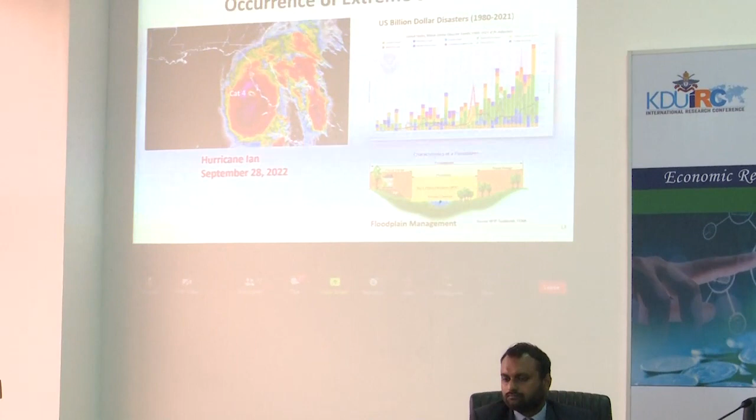When you look at the cost of these events, what we call billion-dollar disasters, they're increasing significantly in recent years. This might be the result of development without any planning, and that's a sign we are going to have more and more losses in the future.

One aspect we should think about, which is not really happening in Sri Lanka in my mind, is this whole idea of floodplain management. If you take major river basins in Sri Lanka, every year one of the basins will be flooded, now more and more frequently. I think we need to think about floodplain management in the context of climate change, and it's something I've been trying to promote in Sri Lanka for some time.

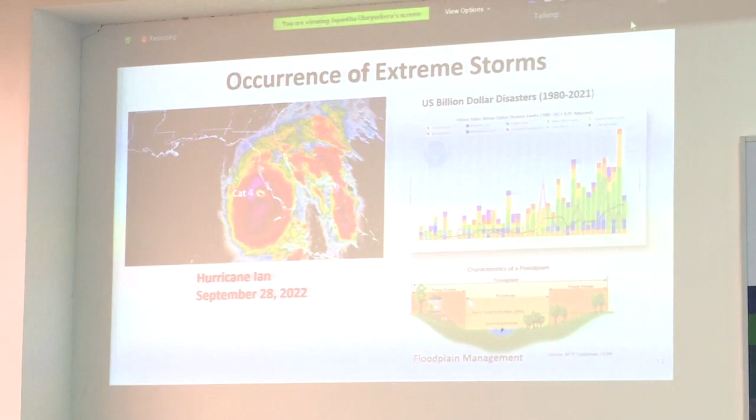The other aspect we don't talk much about as civil engineers is this groundwater or saltwater intrusion effect, particularly along the coastline. The saltwater intrusion will basically affect high-rise buildings or other buildings, with salty water coming in and affecting the foundations and maybe even piles that you construct for buildings and others. This is a new area of research, and I will tell you the reason why.

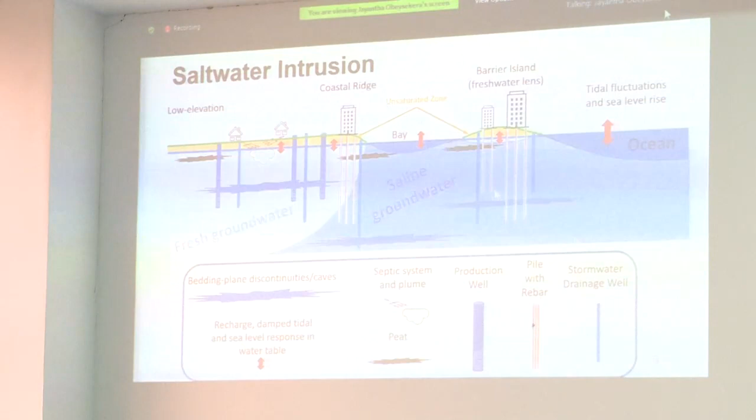This video I'm going to show is from YouTube. Let me see - this is a collapse of a building in Miami Beach. You will see that this whole building has collapsed. So this is what happened after the building collapsed. Everybody was wondering, because we don't design engineering buildings to collapse like this. So what is happening underground is probably the main culprit - the saltwater intrusion due to sea level rise basically corroded the foundation, something like a threat underground that we don't know about, and that's something we need to think about.

This whole concept of stationarity and non-stationarity is something Professor Fernando mentioned, and something I've been researching lately. Traditionally in engineering, we assume stationarity—meaning the basic laws and patterns stay the same, and the past climate is an indication of the future. So when we design for the future, we assume the probability of extremes remains the same through time, and we use the concept of return period that many of you engineers might be familiar with.

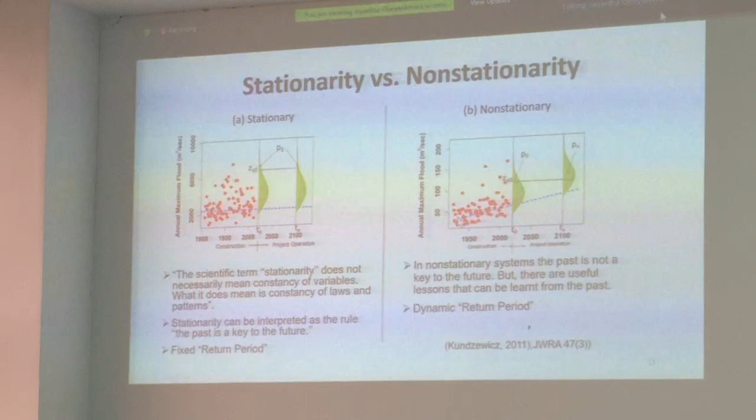Now, under non-stationarity, the probability distribution will basically be changing with time. It will be lifting up with time because of this trend that we might experience in the future. So there are many challenges in analyzing this.

We have done some research on how to plan for projects under future conditions like this. In this case, the past is not a good indicator of the future. We need to think about what could happen in the future—can we extend this trend into the future? Those are some of the challenges.

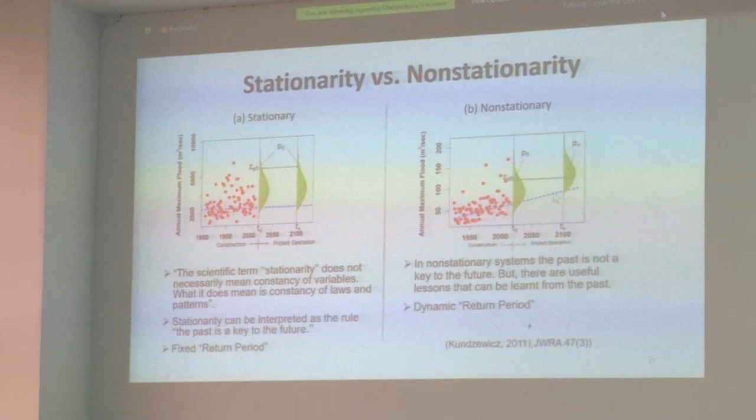So we have a situation of dynamic return period, which I'll explain in a few minutes. In other words, the return period as a fixed quantity cannot be used for planning anymore in this paradigm. This is an example of sea level rise—even in designing bridges or roadway infrastructure, the dynamically changing extreme probabilities will require a new paradigm for planning and design.

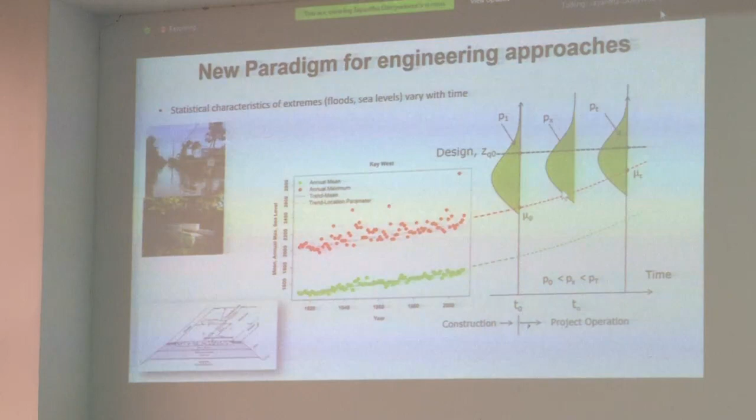I don't want to go through all the details of this graphic, but the return period will actually decrease. If you design for a 100-year return period today, for example, it may have only a 50-year return period by 2040. So in other words, your level of protection is decreasing.

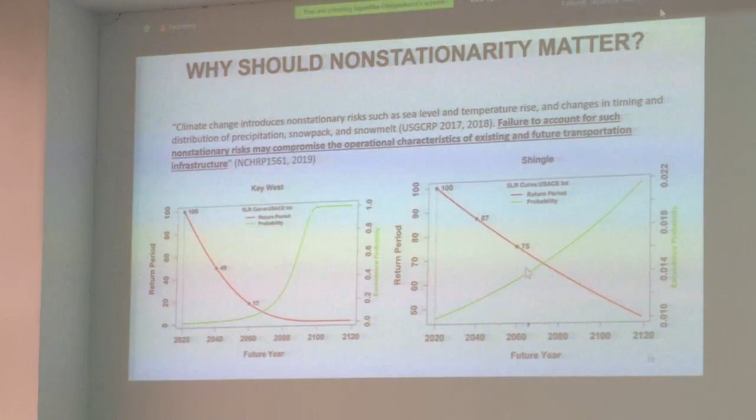And the same with another location—this is for sea level rise on the left and flooding on the right. In other words, the return period concept that we have been using as engineers for generations will not work anymore in this kind of setting.

I have come up with ways, if you specify that you don't want a higher risk than, say, 50%, to determine what you need to design for. So this risk-based design is an approach that could be expanded so vulnerability can be incorporated into this concept.

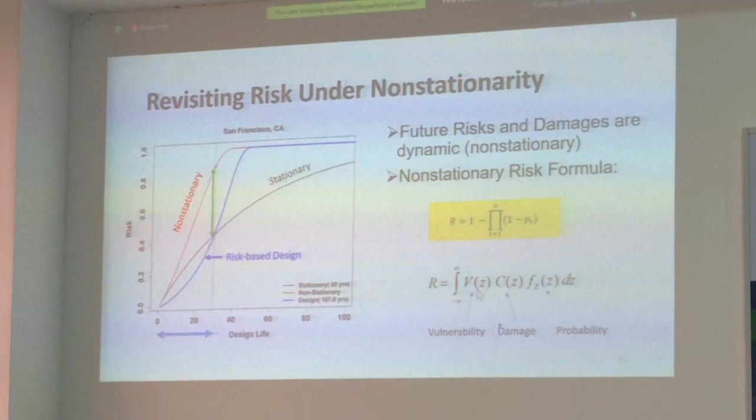The concept I want to promote is called dynamic adaptive pathways. We worked with the Dutch on this. The whole idea is that we are in an existing situation with highly vulnerable conditions, and we've had that for generations—there's no change in that. We have aging infrastructure, but we have this current situation.

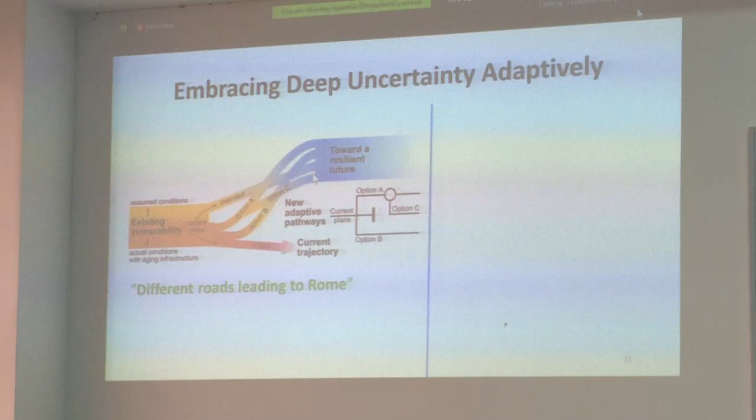But the future is non-stationary, and due to climate change it is uncertain, because prediction of climate change is not easy. We have what we call a situation of deep uncertainty. So how do we plan for that kind of uncertain future? The approach is basically looking at different adaptation pathways and tipping points. This concept of dynamically adaptive pathways is a wonderful technique that we should think about in dealing with non-stationarity and climate change in engineering.

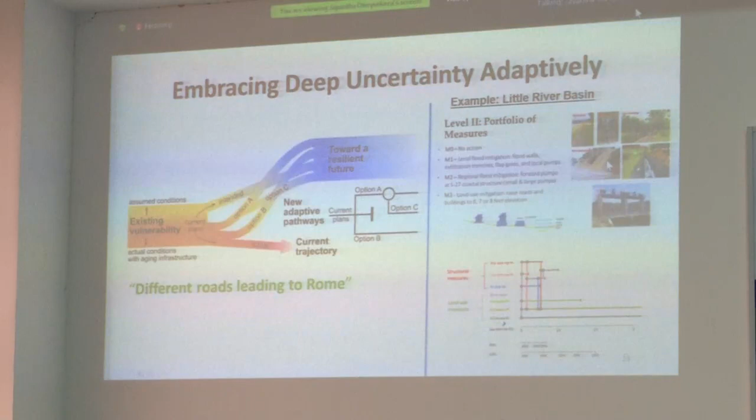One example we looked at was an area in Miami. We looked at various options or a portfolio of measures, from pumps to seawalls and others, and eventually elevating the roadways and houses. The idea here is, how do we phase these solutions in? We came up with this pathway concept.

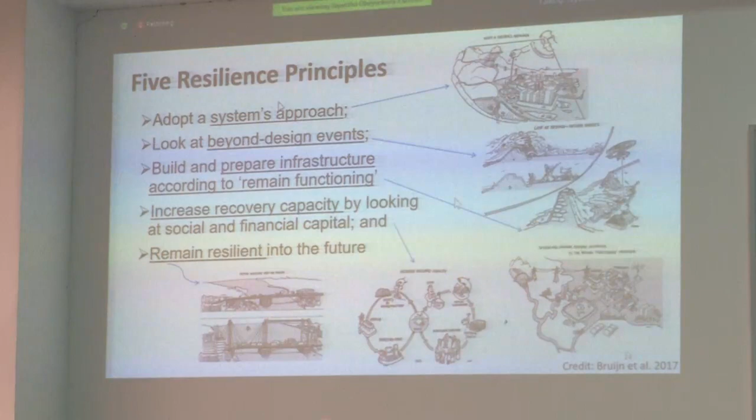Number three is, we need to think about how we design a project using this concept of 'remain functioning.' Just because it fails once, maybe the project does not need to be abandoned. How do we make sure it can be used or designed in a way that it can be enhanced or rebuilt easily, and improve recovery capacity by also looking at social and financial capital, working with communities? And then, how do we remain resilient into the future by looking at this concept of non-stationarity?

With this, I will stop here because I think we might be coming to the end. But anyway, with that, I guess we'll take questions at a later time.

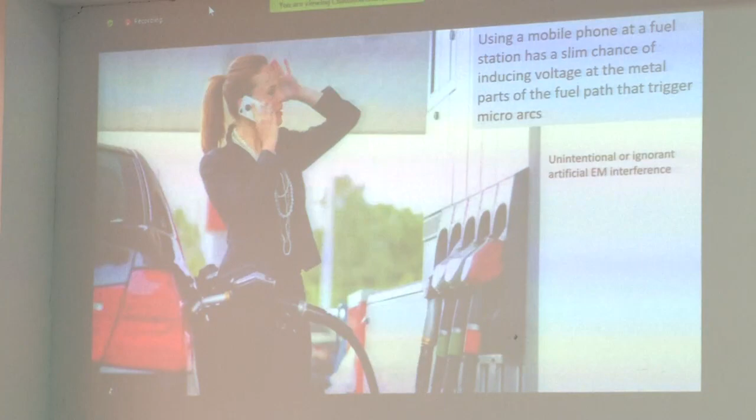Okay, now we are coming to the interesting point. Say that this is unintentional or the ignorance of the person who's using the mobile phone. Say this happens. Now imagine a terrorist who brings an EM emitter a million times more powerful than a mobile phone, fixed in a double cab. Then he or she illuminates the fuel path. When I say fuel path, it may be the pump, or it may be a tube which carries fuel from one place to the other, or it may be the end of the pump which is putting petrol into a vehicle. And then this may be extremely hazardous, and it is very possible.

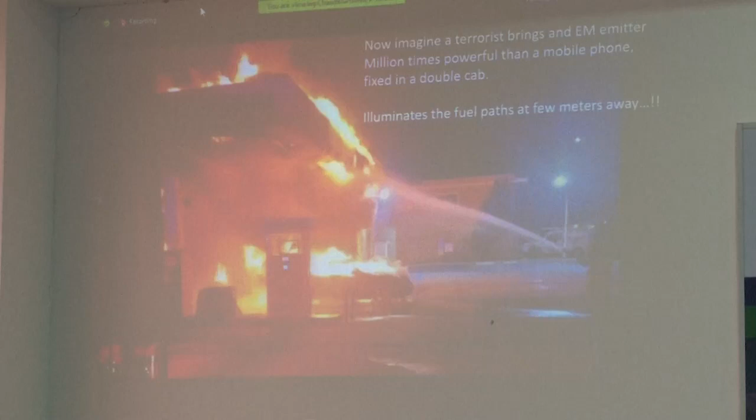Okay, so these are not abstract things. These are very possible. And to be honest, I wonder why it is so late. Anyway, this is where we start our story: intentional electromagnetic interference, which is a solid reality in the modern world.

Now, the modern society heavily depends on the information technology that we all know. A majority of public services such as power, communication, and so many things are fully controlled by electronic means, even supermarkets. The disruption of the information technology which controls these computerized systems may handicap the entire civil network, thus causing financial and service losses, health hazards, distorted and chaotic society, and even political and military instability.

Now imagine if the total power system in a country collapses for 3 hours. I don't know about Sri Lanka, but in many other countries, that may be the end of the existing government. And imagine if the banking sector collapses for a day or two days, that may be a disaster for a country. Thus, modern-day terrorists and criminals tend to adopt sophisticated technological warfare rather than traditional destructive techniques such as explosives and firearms.

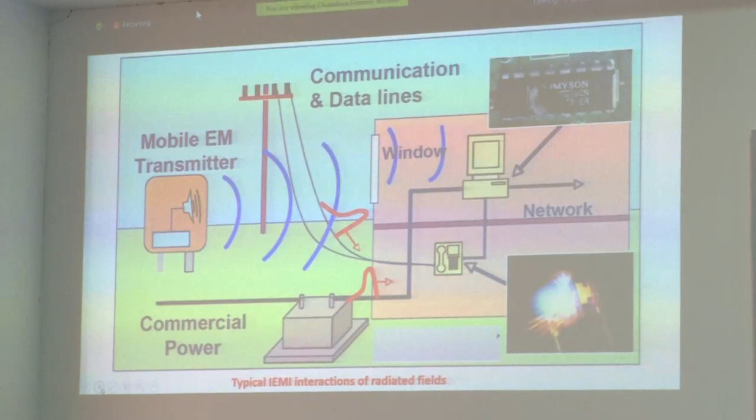You can illuminate the power lines, the communication or electrical lines coming into a house, the equipment itself, or any other commercial system. This illumination will generate a voltage impulse in these systems, which will destroy, permanently or temporarily, the electrical systems. Even if it does not damage them, it can cause malfunction or mislead electrical signals.

Now the question is, who will be the electromagnetic weapon users? Terrorists - very simple, anybody can expect that. They typically aim at enemy targets to obtain military and political gains, or at public services, to disrupt normal civil life and make chaos among the people. This is very understandable, I think.

Then criminals. They may use electromagnetic weapons for personal rivalries, inter-gang warfare, mafia-type attacks, robberies, attacking locks, security and alarm systems, communication systems, and frauds - illegally interfering with computer systems to access financial statements, secret documents, passwords, and so on. Actually that part is more defined under cybersecurity these days, but in the good old days we defined them under electromagnetic warfare. Or industrial espionage - sabotaging rival companies, suppressing competitors, and so on.

Imagine that in a factory, if a very urgent, important supply is stopped by interrupting one part of the supply chain, that will be tremendously affecting the business of that company.

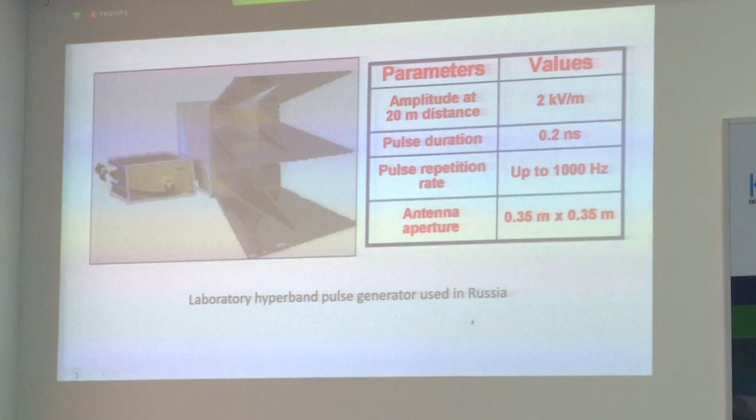Now I will quickly go through some of the devices available at present or easy to make. Just to save time, I'm not going into the details - you can read them. This is a bigger type one, which you can access through military channels. And this is a briefcase-planted continuous wave generator.

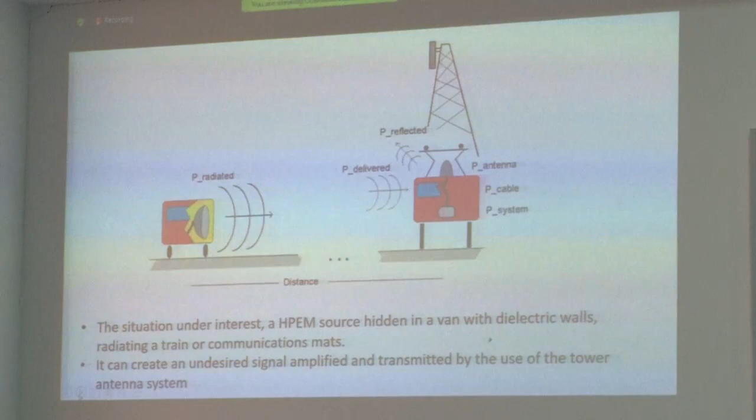Nowadays, one of the other scenarios we are really scared of is the way a terrorist can use a communication antenna, which is used for very good useful purposes, as an amplifier for an electromagnetic generator that generates malicious waveforms. This is something we are still studying.

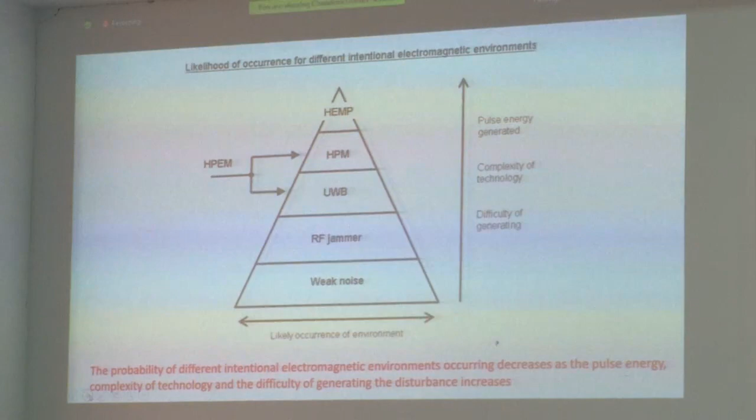If you look at the pyramid, we can see that your blender or most electrical equipment nowadays come with much better electromagnetic compatibility measures taken at the manufacturing stage, compared to 10 or 15 years back. Those are very many, but their effect is mostly momentary and not very much affecting our systems other than causing inconvenience.

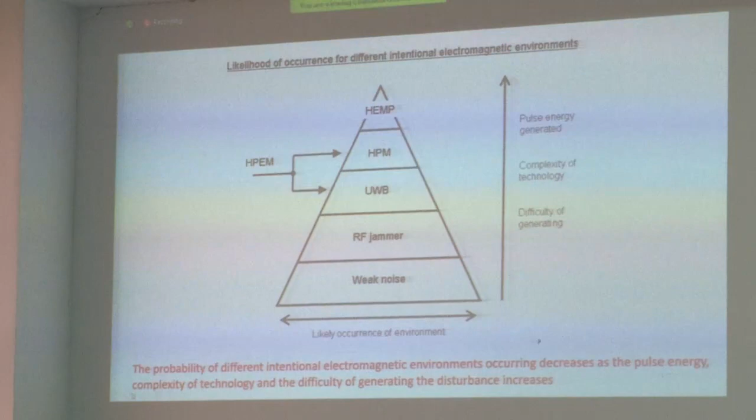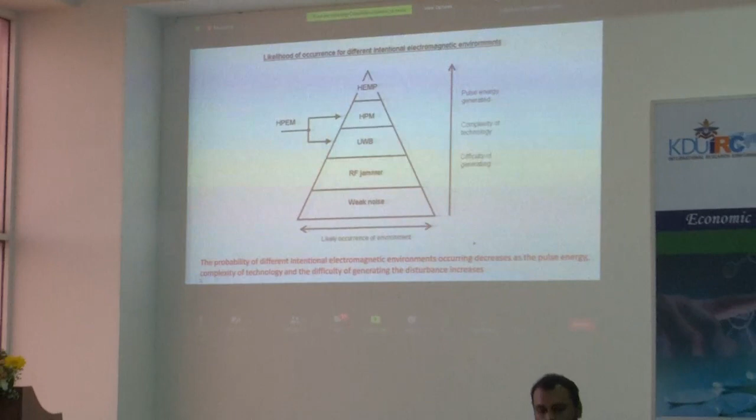Then the RF jammers used by police, military and so on - that is the next level. Then comes the ultra-wideband emitters, which can disrupt to some extent. But when you go to narrow band and high power electromagnetic emitters, they can cause much higher damage. Then at the top of the pyramid, you find the so-called high-altitude electromagnetic pulses, usually generated by exploding nuclear weapons at high altitudes so that you can illuminate a very large area at ground level.

The problem is, in the 90s we got many of these incidents into the public domain. But lately, after about 2004-2005, the developed countries understood the risk of giving that information to the world, so most of the incidents are now blanketed from public domain access.

I will not go into the details because addressing this scenario is really difficult for a country like Sri Lanka, but this is a real threat. Nowadays, HPEM or even normal electromagnetic generators can be mounted on drones and fly over critical installations, destroying the electronics.

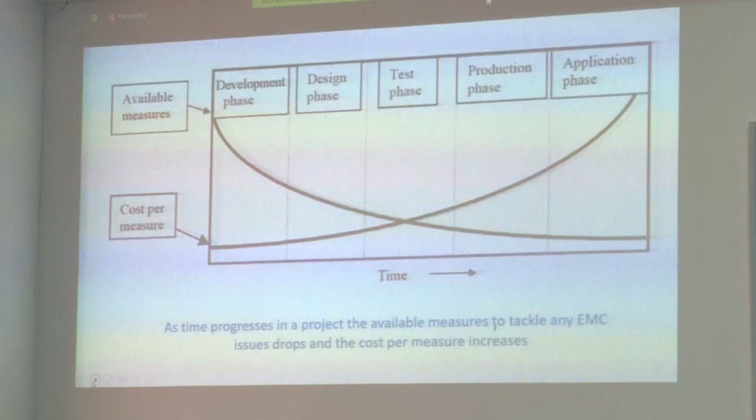Now I'm coming to an important point. There are a number of ways terrorists may use these EM weapons to attack military and civil targets. As far as the military is concerned, aviation is at risk of being attacked by EM means. A landing aircraft would typically be at a height of 100 meters at 2-kilometer distance from the edge of the runway - consider Ratmalana Airport as an example.

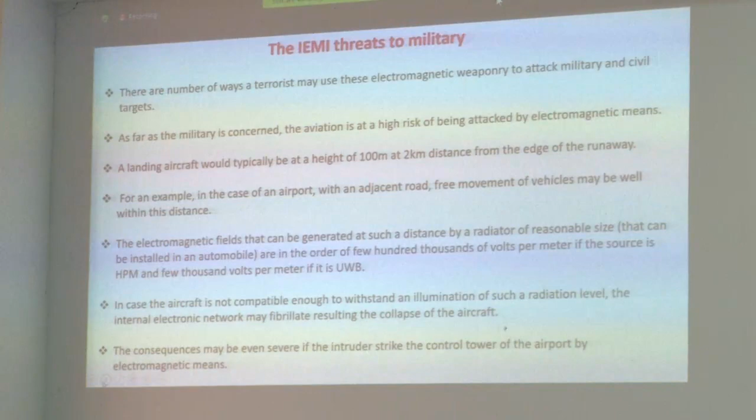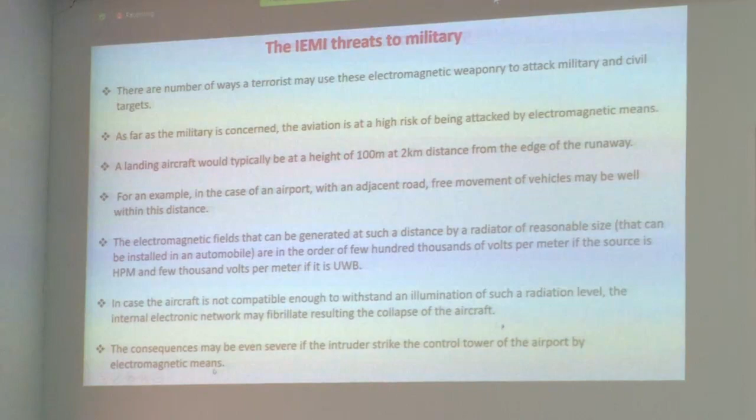In the case of an airport with an adjacent road, free movement of vehicles may be well within that distance - again, Ratmalana Airport. The electromagnetic fields generated at such a distance by a radiator of reasonable size are on the order of a few hundred thousand volts per meter if the source is HPM, and a few thousand volts per meter if it is UWB, ultra wideband. If the aircraft is not compatible enough to withstand illumination at such radiation levels, the internal electronic network may fibrillate, resulting in collapse of the aircraft, and the consequences you may understand.

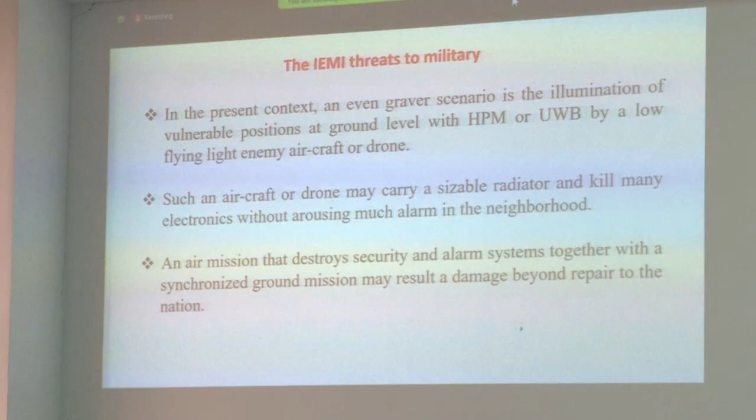In the present context, an even graver scenario is the illumination of vulnerable positions at ground level with HPM or UWB by a low-flying light enemy aircraft or drone. This threat was very much present during the civil war in Sri Lanka, but unfortunately at that time drone technology was not that developed, and the emitters were not as powerful as we have today. So now you understand the threat.

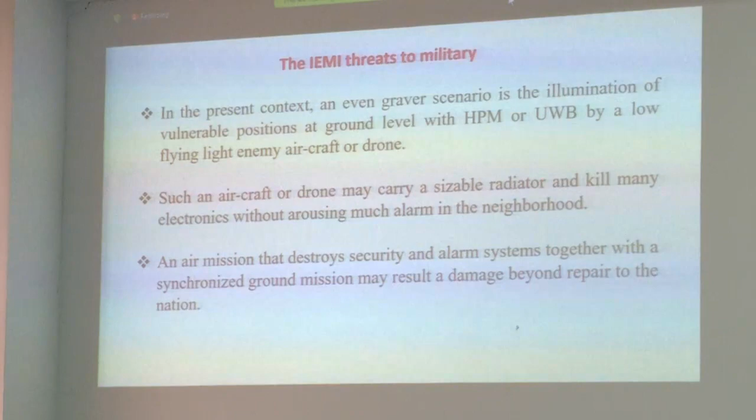Such an aircraft or drone may carry a sizable radiator and kill many electronics without arousing much alarm in the neighborhood. An air mission that destroys security and alarm systems together with a synchronized ground mission may result in damage beyond repair. And don't forget, when it comes to these EM emitters - I'm repeating this - the attacker can attack multiple times without the victim having any idea of what's happening.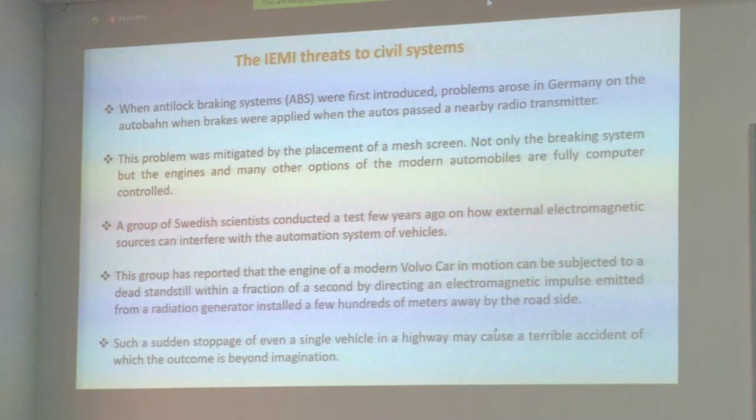Then the civil systems - when anti-lock braking systems were first introduced, problems arose in Germany on the Autobahn when brakes were applied as the autos passed a nearby radio transmitter. So without going through this in detail, what I'm trying to tell you is that speeding vehicles can be stopped instantaneously with electromagnetic interference.

It can be used for sabotage, and it can also be used by police for useful purposes, I may say, to stop a criminal getting away from them. And banking systems can be affected. Water supply, electrical supply, and communication supply can be affected. There are so many things I have to tell, but I have no time to go through them.

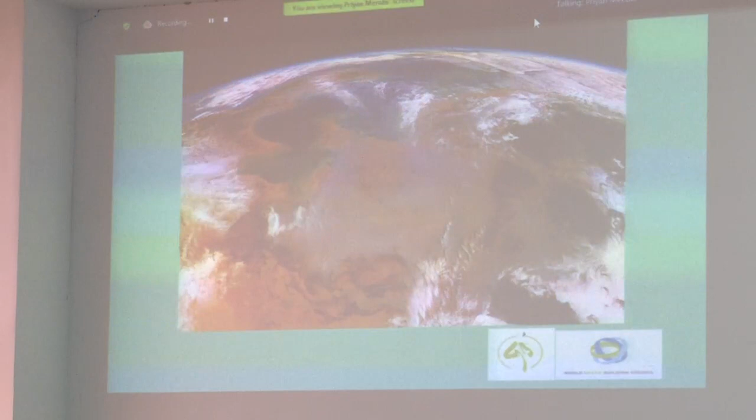Some of the talks I gave in World Green Building Council sessions had some of these slides. We already know about the ozone depletion, the greenhouse gases — it's been there for a long time, so I will not go into it just to save time. But this is real — the carbon dioxide, when we measure with sensors in ppm, we can see it is increasing. There's scientific evidence now, there's no one who could challenge climate change.

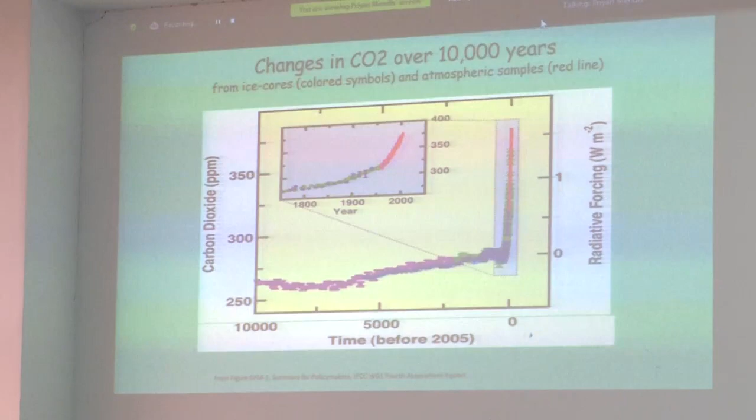It's true that in those early days when you talked about it, some people were saying, 'is it true?' But now everyone is convinced. The temperature rise is also being proven, and it's nothing unusual now that it's happening, so we need to do something. That's where all this net zero talk comes from — we have to think about the next generations, and even the present generation is in danger if we don't do anything. So it's a very ambitious target, net zero by 2050.

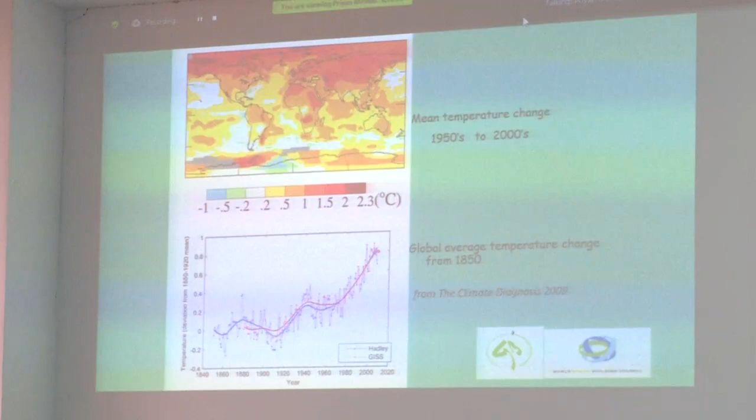Australia has come up with a target of 43% reduction in emissions by 2030. For example, today there was an announcement of closing down one of the coal-fired plants 10 years ahead of the scheduled close — they're closing all of these very quickly. Australia's economy depends on some of these plants, but we have taken some very brave decisions here, and I'm proud that Sri Lanka is also following some of those.

There's an interesting book by Mark Lynas — if you happen to read it, he talks about 6 degrees. Let's not worry about 6 degrees — he's saying once we reach 6 degrees, humans may not even exist in so many years' time. So it's true that whether it's 6 degrees or 2 degrees, it doesn't matter. What he warned so many years back is that we had to do something, and now we are seeing some action happening.

So it is real, and we're seeing it getting closer to us — in Sri Lanka, we know the droughts are there, and climate change has effects. Floods and landslips have also been there.

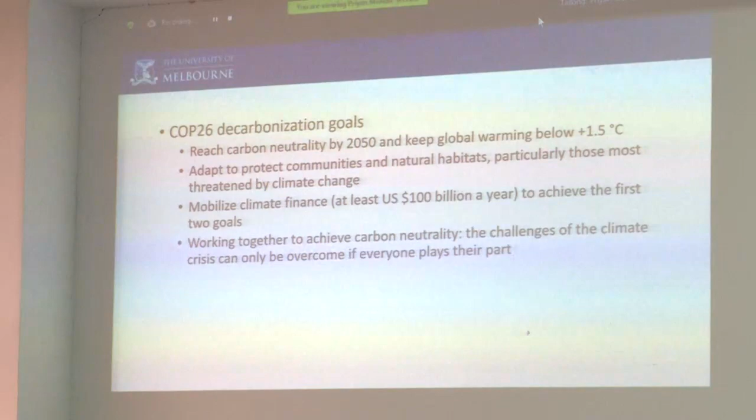So this is really happening, it is real, and the Glasgow summit changed a lot of things. Now, the last 6 months especially, things have changed so much as well. Everyone is now talking about this, working on decarbonization. So we have been there before, some of us had a head start, and we are continuing our work in that. It's really decarbonization that's the key word, UN sustainability goals and all that, really complying with that.

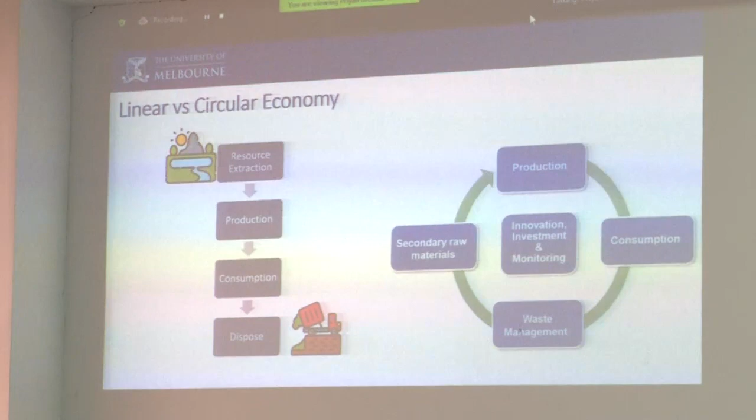Now everyone talks about circular economy. So what is the circular economy? We produce something, consume, and then we do some waste management, and then we get the raw materials for the construction industry. So that is really coming full circle. We call it cradle to grave, and grave back to cradle. Cradle means birth to death before, in the linear economy. Now we are going birth to death, coming back to the birth. So this is really a simple definition.

When I started the center, it was all new, and we all did a lot of work trying to introduce this to the Australian industry. Then we placed them. The advantage - again, I will not read it all - is once we have used them for so many years, the design life and all that, we can reuse it, we can put it somewhere else. We can really dismantle it and take it off, because normal construction, we are used to in situ, all that - we can't demolish, we need to demolish the whole building or structure or infrastructure. These ones we can dismantle, remove it, and place it somewhere else.

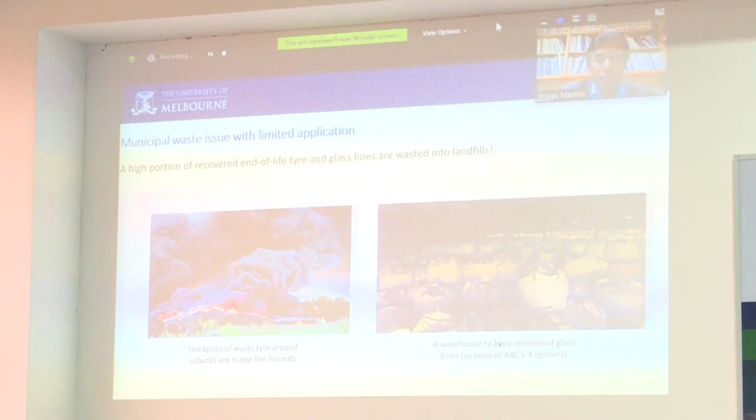In this case, the waste tire, the glass, we can recover. The recovered glass, the waste tires, is a big problem everywhere around the world. We are trying to use these waste materials in a positive way, not just taking waste and dumping into concrete and saying we are using waste.

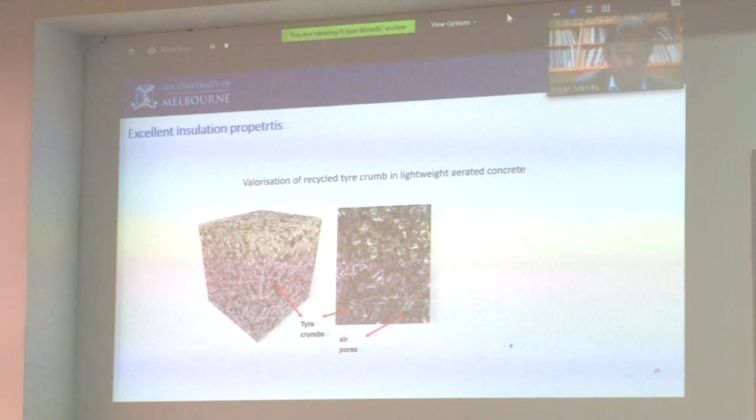We want to make use of the positive properties of those waste materials. Take rubber, it really increases the tensile strength, so we can put it in the roads. When you put it in the roads, we can get rid of some of the cracks, shrinkage cracks, temperature cracks. So we think positively like that. Waste materials add value to the construction materials, and that way we are also reducing the emissions because we're reusing the materials. Some properties like insulation can be increased by putting in tyre crumbs.

This is a project that we are very proud of: Metro Tunnel, the biggest project in Australia at the moment, in Melbourne. We are putting glass fines into concrete in that project, not everywhere, but a couple of slabs as a trial. There's a big problem in the world going from lab to the real field. In the lab we can do many things, but really getting into the real field is the biggest problem.

We were working in Australia on things like the pumps. When you put glass fines in, the pumps get damaged. These are practical problems you don't see in the lab. So these are the real things we had to deal with to get to the field, a few things that have to be done. And these are the glass we are using.

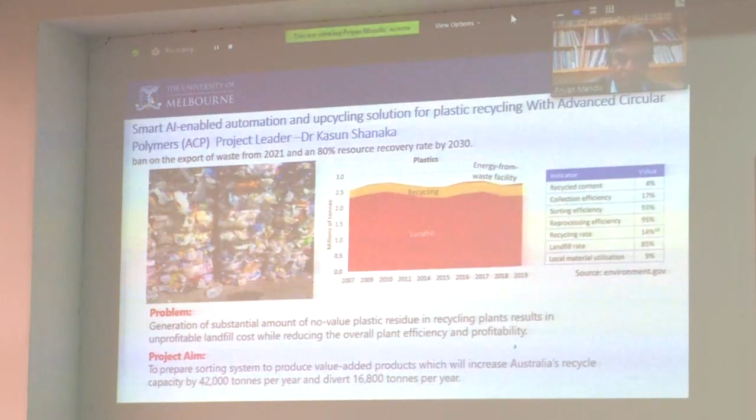Plastics, we are working with the biggest plastic recycling company in Australia, converting them. This is a factory. Dr. Kasun Shanaka, a product from Sri Lanka, is really leading this project, putting plastics into various products. He's working on artificial intelligence for waste identification, creating databases and training. These are very sophisticated works being done. He's working on robots to really go and do the sorting rather than just people. That sort of work is being done with the industry, that's our strength, working closely with the industry, not just in the lab.

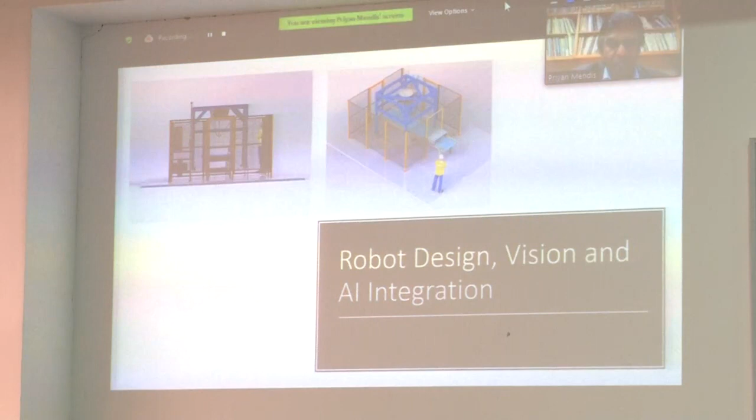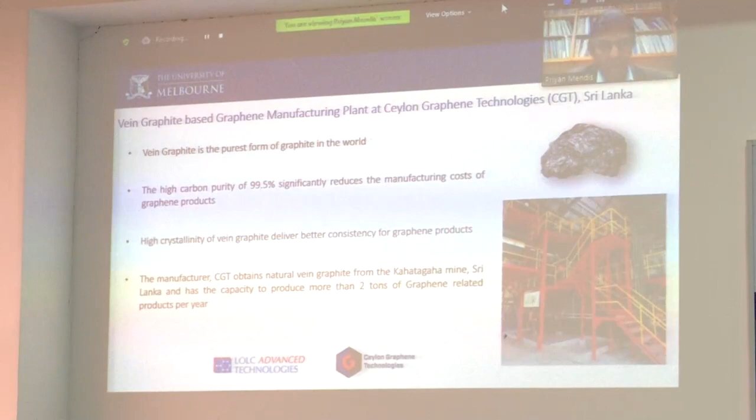Graphene concrete is a big one that our group is really working on. Tusita is leading that work. Graphene is the wonder material. There are increases of properties: compressive strength, tensile strength, flexural strength, abrasion resistance for roads. We are the main research provider for this work, working with the LOLC company with Mr. Ishara, the group with Ceylon Graphene Technologies. We are very proud of this material because Sri Lanka is the only country where you can get this purest type of graphite, because of the Vein Graphite we have in Sri Lanka.

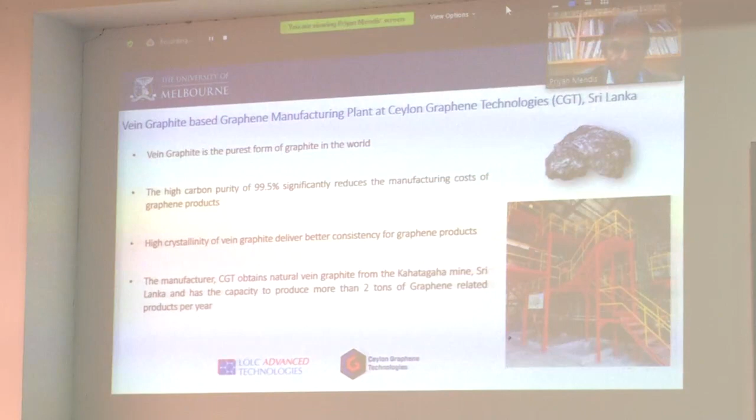So now they have got a plant in Homagama, so rather than sending the raw materials, they're trying to send graphene oxides and on. We are the main research provider. We are very proud. We could put this with Mr. Shiromal Fernando, who is also adjunct in KDU, the CEO of CSEC.

We put it in the design office building. First time, what I call it, we put what is called a fruit salad slab, which is really one of the first in the world to put all this. This was done end of last year. We put everything into a slab, this is in Madinagoda, the head office of CSEC. We put all sorts of things into that, and it's been working in practice.

One thing I will not go through in detail, but embodied carbon, again thank you Tusita for this slide. Embodied carbon on the y-axis, the concrete strength on the x-axis. We are doing lots of calculations. Carbon footprint calculation is key for any project, whether civil engineering or any project, to get these numbers, because we want to work towards net zero, we need to quantify.

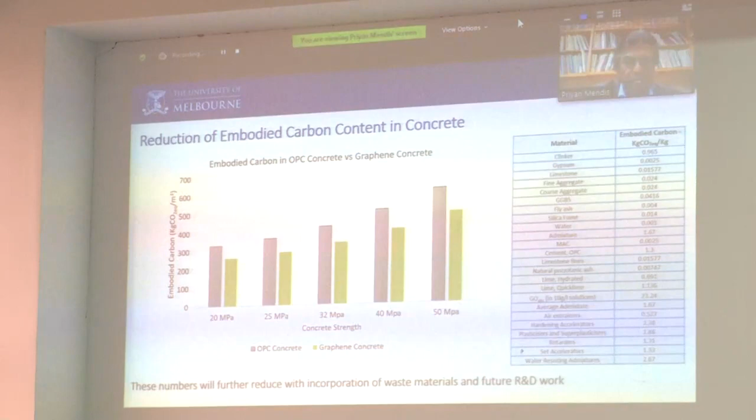In this case, we are quantifying, we are showing that by putting graphene we can have 32 MPa Portland cement concrete with a carbon footprint somewhere there. And then if you get to 40 MPa with graphene concrete, strength increases but the carbon footprint is the same or less. Another parameter has been added, not just the cost. This will be seen in the next so many years in the world towards 2050 and beyond. So this sort of quantification, those who are working on it, we'll get to that and try to quantify.

We have a project where solar panels are being recycled. We had to combine with renewable energy. Mr. Dalugoda will be talking a lot about some of those aspects as well. So we are recycling, one of the first recycling plants in the world for solar panels. We are working on that. I think we showed this one before.

One last slide before I finish. I can talk for hours and hours, but because I want to do this quickly, this talk, I'm sure there could be questions on this.

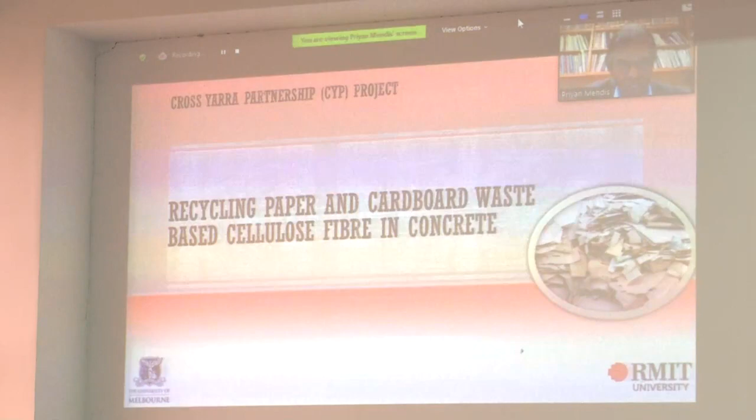So this is a new thing we have done, to use paper. There's a lot of paper being used, so why don't we try paper? This was sponsored by one of the Metro Tunnel projects. This research work, we are putting paper into concrete and trying to put that in the real world. We can do a lot of things in the lab, but in real projects, that's where the gap is in the world. This is the type of paper we are using, magazine paper, newspaper, and all that, working with the paper industry people, and trying to put that into concrete has been successful. The initial work has been successful.

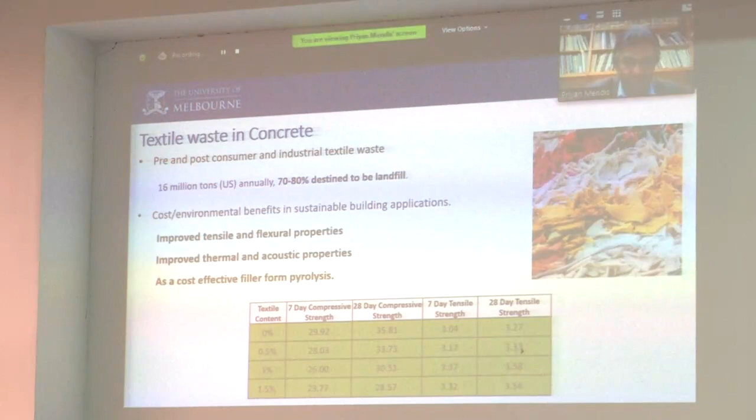One last one to say, textile is another big one. I think we got these textiles from somewhere there, is it Hamidias or something? Brandix, from Brandix, thank you. This is with me here, he helped with this work with Brandix and continued the work in Melbourne as well, with textiles, with the waste in concrete and the tensile flexural properties. Actually, the textiles increase the tensile strength, as you see here. It's not just a waste material, so use the positive properties of the waste materials. That way, I think we can make an impact to the environment in the world. So I was only giving a few examples from circular economy, examples like modular construction, where you can dismantle and relocate somewhere rather than destroying.

So connections and all that are very versatile connections where it can be removed at any time. So done in the factory, so quality, everything improves.

Second example in circular economy in our construction industry I gave is using waste materials, which we'll see a lot, because we are running out of construction materials. We are running out of sand. We are running out of lots of construction materials. Construction is increasing in the world in such a big way.

And I heard Professor Obeysekara talk about the Miami case, which I'm actually involved in as a corresponding member for that investigation. It's a kind of thing that we should avoid, and I think we need to really work on avoiding those failures, at the same time thinking about the environment and using some of these newer materials.

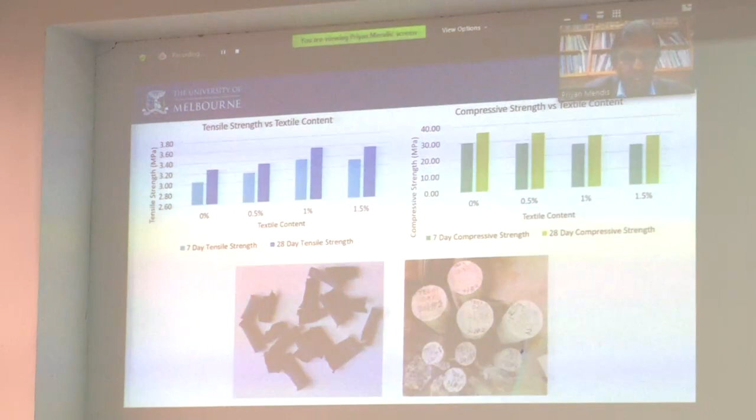So we're careful to do that. So I'll just stop there. Thank you very much, Professor Kumari.

Thank you, Professor Mendis. And we quickly move to the final topic. The final topic of today's IRC Engineering Plenary session is Achieving Sustainability in Buildings. Now, we will look at the concept of sustainability from a different perspective.

Buildings being one of the major energy consumers and greenhouse gas emitters, building performance directly affects climate change. As a solution to this issue, the concept of green buildings has become a trend that is slowly catching up in Sri Lanka, with several LEED certified buildings coming up during the last decade. The director of the Green Building Council Sri Lanka, Engineer Chandana N Dalugoda, will discuss this aspect in detail.

Engineer Dalugoda received the graduateship in mechanical engineering, specializing in HVAC and refrigeration technologies from City and Guilds of London Institute, UK. He qualified as a chartered engineer, worked as manager engineering, and then promoted to chief engineer at John Keells Holdings. After that, he joined as a senior mechanical designs engineer in HVAC at Moran, UK. He is a visiting lecturer at University of Moratuwa, Sri Lanka Institute of Advanced Technological Education, and ISL College of Engineering. Engineer Chandana is an ASHRAE Fellow, member of CIBSE, Fellow of Institution of Engineers, and member of Consulting Engineers Association of Sri Lanka. He is a recipient of the 2015 ASHRAE Chapter Service Award and 2015 ASHRAE Regional Award of Merit.

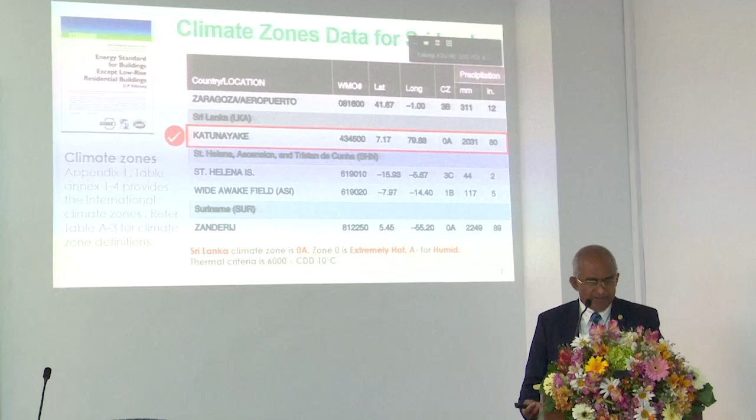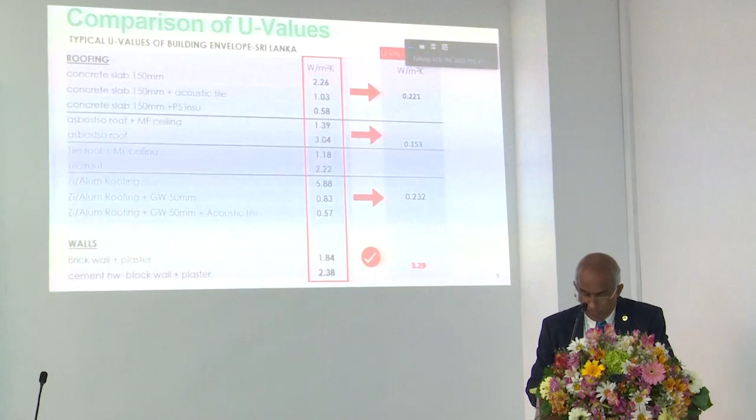Fortunately, walls we are within limits for Sri Lankan standards. Anyway, going back, I will give you a comparison. On your left, what you see here is our local industry U values, the heat transmittance values used. For instance, concrete slab 150 millimeter thick, 2.26 watts per square meter Kelvin - 2.26 watts per every square meter will transfer. But ASHRAE says drop it down to 0.221. That is how we save energy.

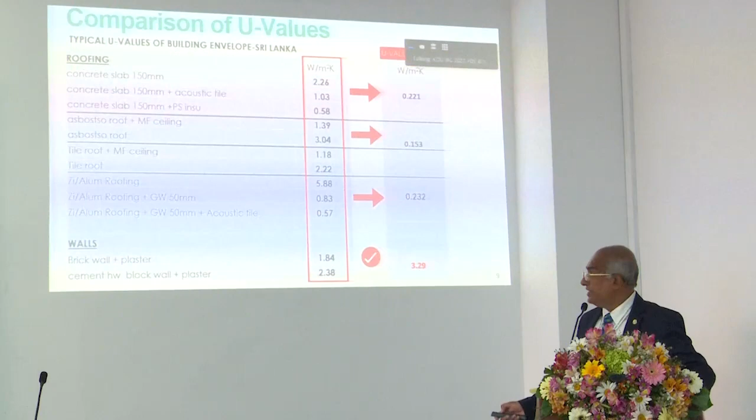Going back to a tile roof: 1.18 down to 0.153. Zinc alum roofing, 50 millimeter: 0.83, no, it should be 0.23. That's how we approach sustainability in buildings.

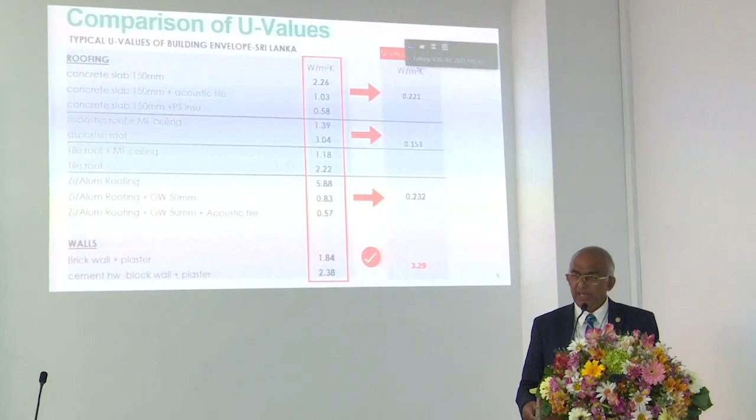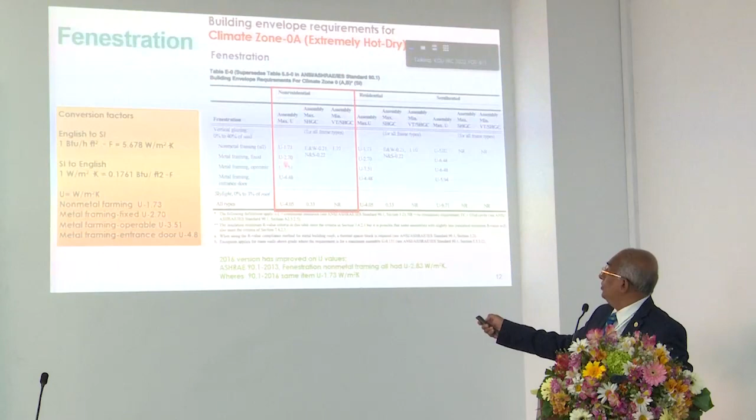Then comes fenestration, that is glasses. Normal glass, 6 millimeter, transfers 6 watts per square meter. Now, for sustainability, we'll have to drop it down to 1.73. Can you see? 1.73. So you got to do that. As a design engineer, you'll have to get that, maybe with laminated glass, a low-E glass, to approach this value. So like that.

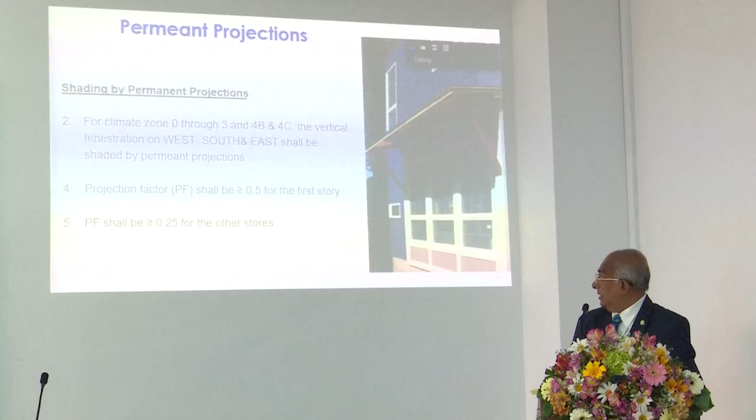Then the projections - simple thing, everybody knows, but these have consequences here for our advantage. Projection factor - you can see the projection factor, the width of the projection and the height. If you increase the width of the projection, your factor increases, and the result is solar heat gain coefficient reduction. So I'm not going to go into detail, it's directly proportional.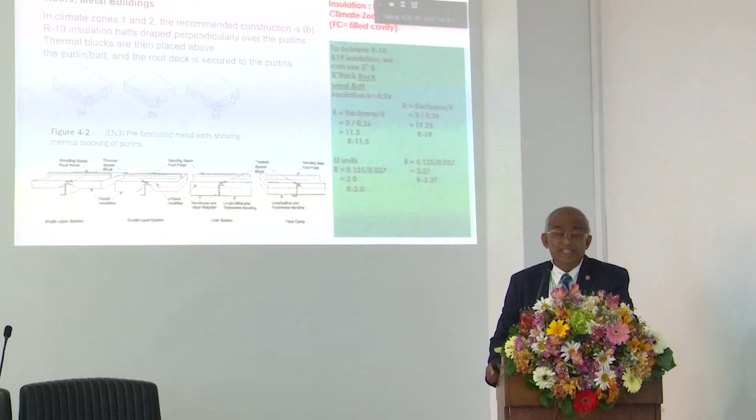Then another thing called continuous barrier - we don't have this in our construction industry, other places do. You have a continuous barrier, a polythene barrier, that will prevent infiltration. That gives a huge prevention of waste.

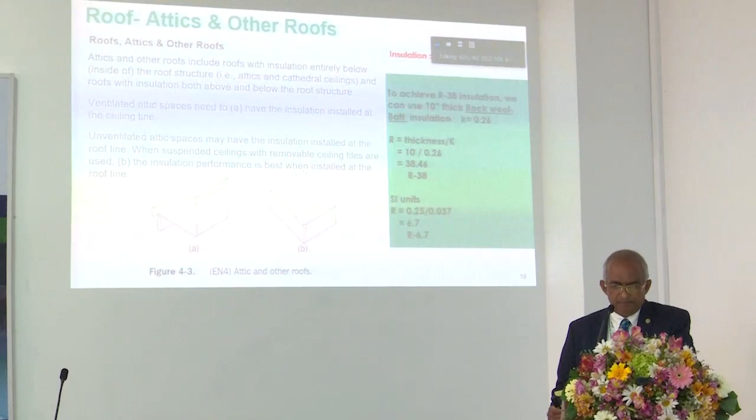Then, how to select equipment? All the equipment involved with a building will have to be selected with efficiency labels. Then the building management systems, we use everywhere. What purpose? People are looking at a monitor - mostly they might say look, the chiller is working, the fan is working, the lights are on, that's it. But they forget to implement energy saving strategies.

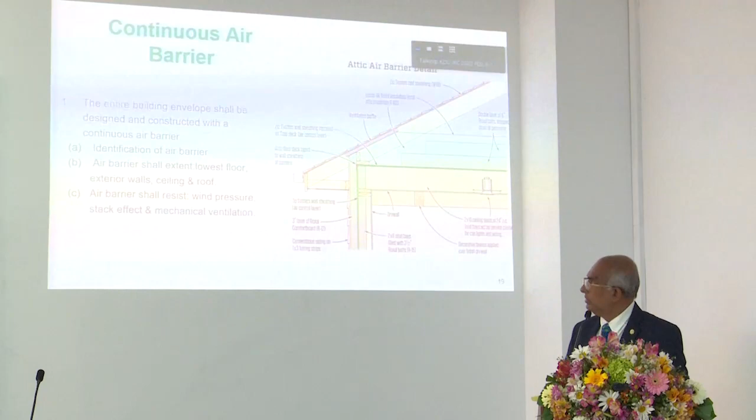These are the energy saving strategies - come on, I'm looking at something. Energy saving strategies like chilled water reset. Every large building chiller, during part load, if you increase 1 degree Celsius, you get a rebate of 1.5% of the compressor capacity. It's huge.

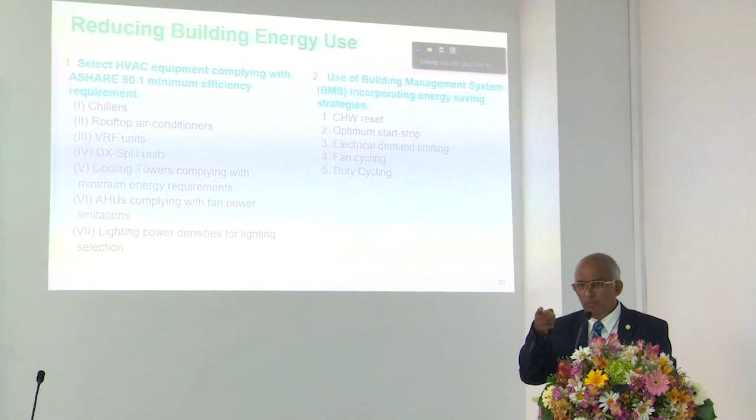Then optimum start and stop. You wouldn't believe, buildings I didn't include here start by 8 o'clock and stop by 5 - this building is entirely central air conditioned. Instead of starting at 8 when your people come by 8, what we do is start by 7. All the chillers run at 7, non-occupied, but you'll see that within the course of the week, the thermal storage effect will give lower power consumption.

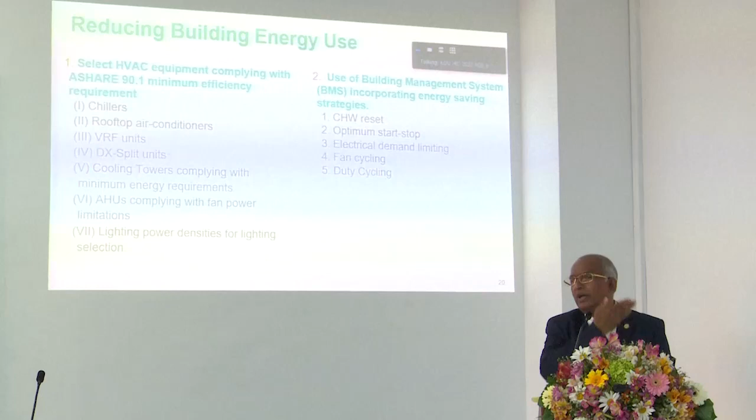And at the end of the week, 30% saving. I'll give you an example - Ceylon Towers. Carbon footprint saving is 30% by doing that with a magnetic bearing chiller.

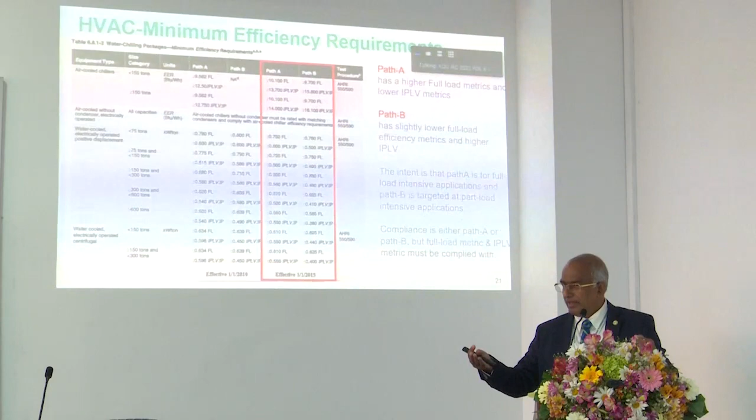Electrical demand limiting - now demand limiting, your peak demand, say 500 kVA, that's set to the BMS. When the kVA approaches 500, it automatically sends a signal to the DDCs and the temperature setpoint of the air handling units is lifted up. That's at 24 degrees C thermostat, now it goes to 25. All the chillers unload, and vice versa. So that kind of thing - fan cycling, duty cycling - those are part of the BMS.

So when you select equipment, the ASHRAE 90.1 guide gives you minimum efficiencies. Now, this one you see here, lighting power density, which is what I told you before.

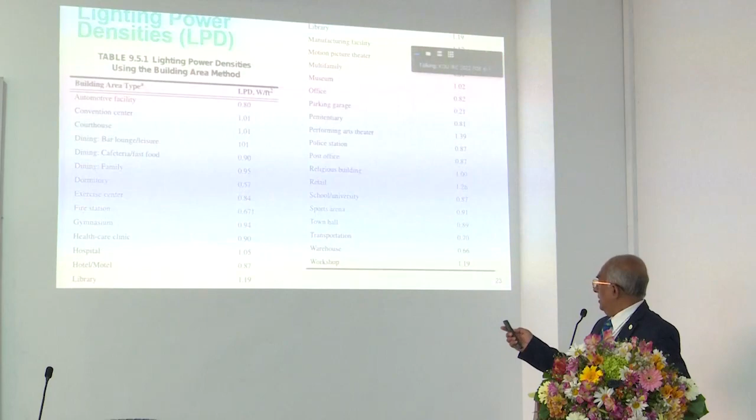Lighting power density - for offices it's 0.82. How to do it? We'll have to humbly ask Professor Lucas, he'll tell you what kind of fittings to use. We'll have to get advice from people like them, but eventually we'll have to comply with these power densities.

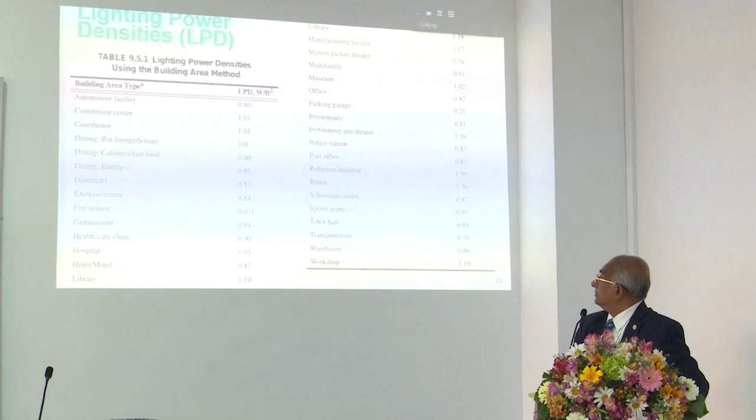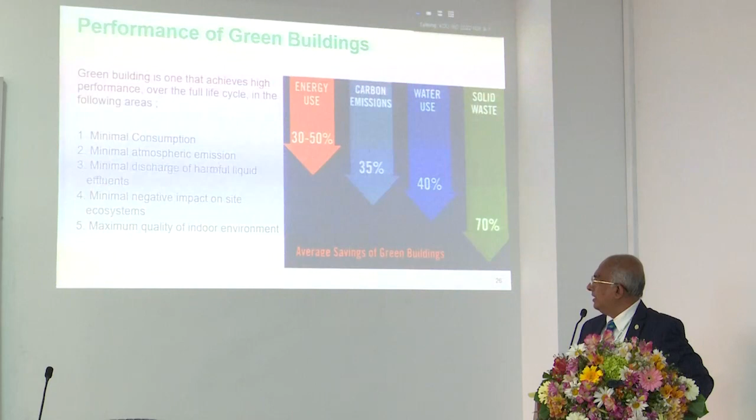So converting to green building, right? I'll go quickly. Now, green building has performance targets like this: minimal consumption, minimal atmospheric emissions, minimal discharge of harmful liquid effluents, minimal negative impact on ecosystems, maximum quality of indoor environment.

Finally, these buildings have savings - can you see? Energy, 30 to 50% energy savings. Carbon emissions, 35% saving, 40%. So KDU must have a couple of green buildings, wouldn't you think so? Green Building Council Sri Lanka has building certification systems - certified building, silver rated, gold rated, and platinum.

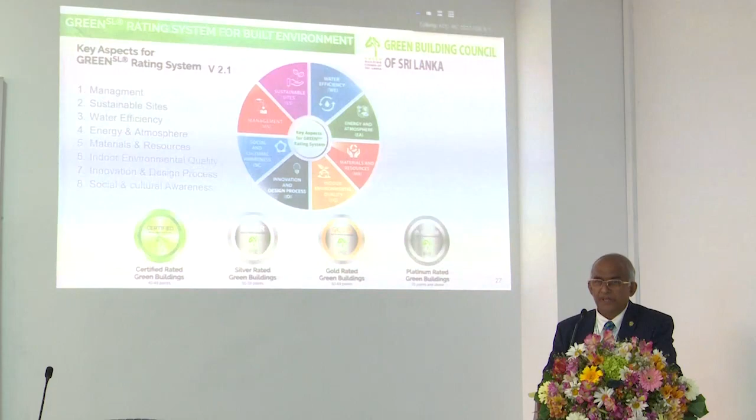So if you can certify a building, surely your carbon footprint will reduce. I'd like to invite all of you, if you're students, please go back today, go home and find the carbon footprint of your house. How to do that? Take 12 months' electricity bill, take total units - that's the energy consumed, other energy you don't have - multiplied by the emission factor.

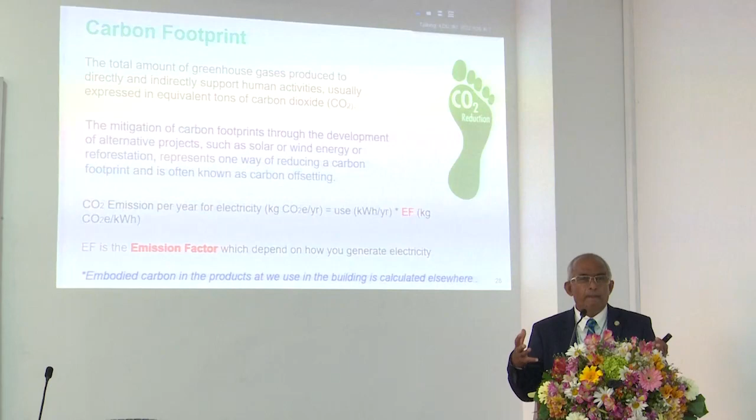The combined emission factor is 5.8 times 10 to the power minus 4, I can't remember it exactly. That gives the equivalent tons of carbon, say 2 tons - let's say 2 tons. So that is your carbon footprint. So why should we calculate that?

Now you take measures to reduce that - that's how carbon footprint reduction works. That doesn't mean you switch off lights and just stay. So this is the carbon emission factors, and Sri Lanka's emission factor is 5.8 times 10 to the power minus 4, multiplied by your total electrical kilowatt hours per annum. That gives you your carbon footprint.

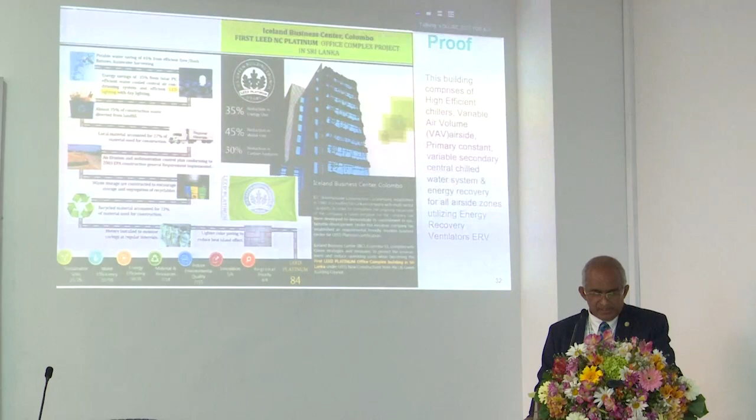Finally, I have an example - this is the last slide, a proof of a green building. This was built, I think, probably 10 years ago - Iceland Business Center, Colombo. That saves 35% energy reduction, 45% reduction in water usage, 30% reduction in carbon footprint. So that's how we go for sustainability in buildings.